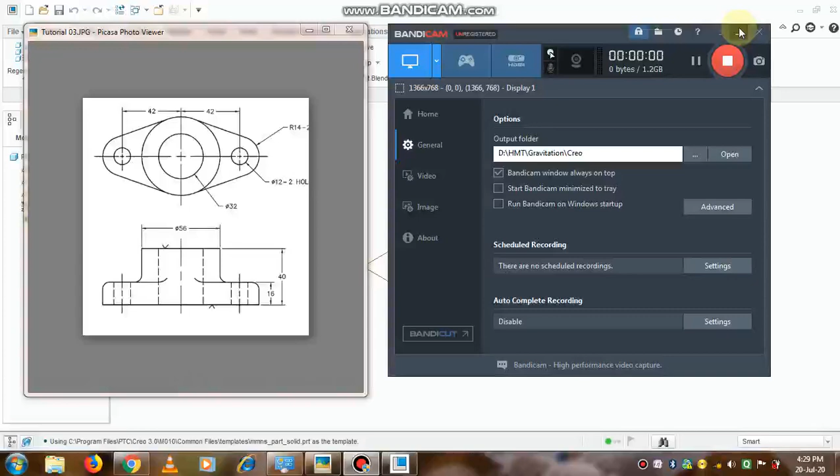In this video we will see how to create a pipe joint. So the front view and top view is available with us. Now from the front view and top view we can calculate the dimensions.

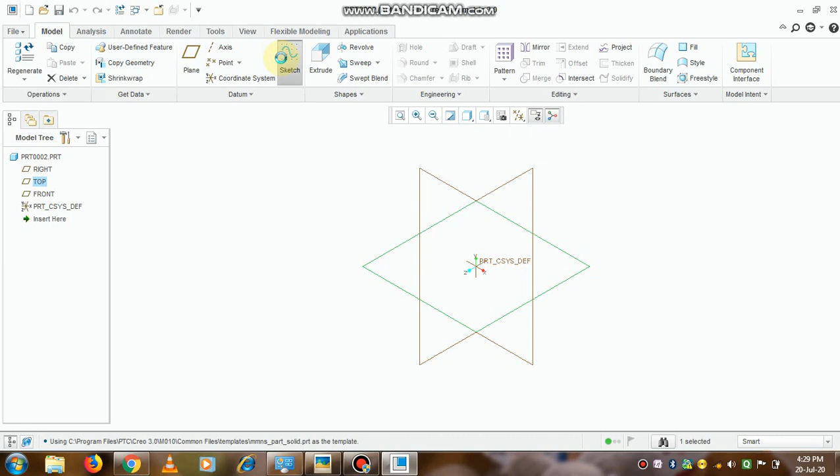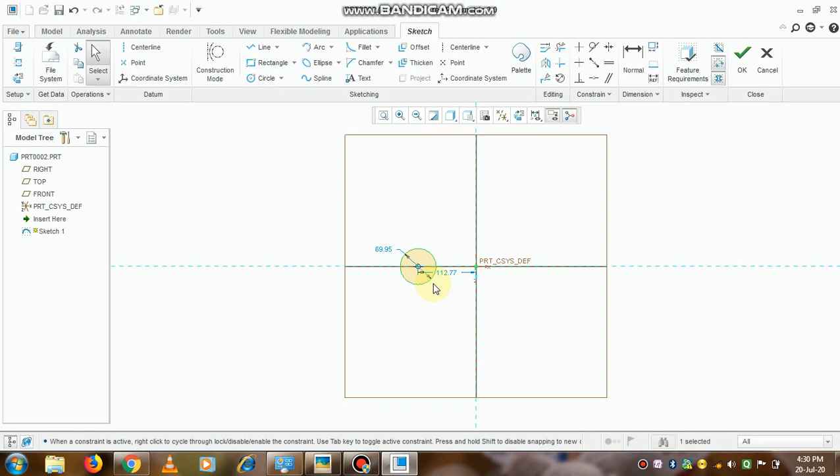So first of all select the sketch plane. Top plane I have selected here. Sketch view. Now first of all we will create a base plate. We can roughly create the geometry and then can give the dimensions.

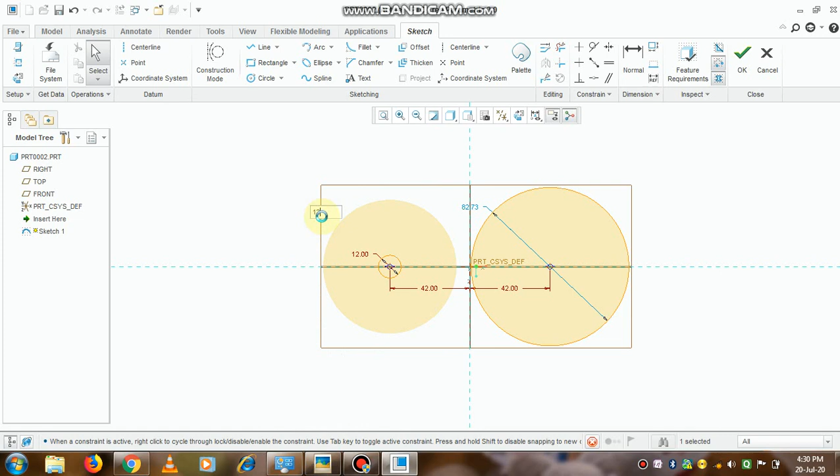So from the center the distance is 42, so that's why I am making it as 42, and the dimension of the hole again we can cross check it. So phi 12 is given, so diameter 12. Now for the outer hole, that is phi is given as 56, so we will create it.

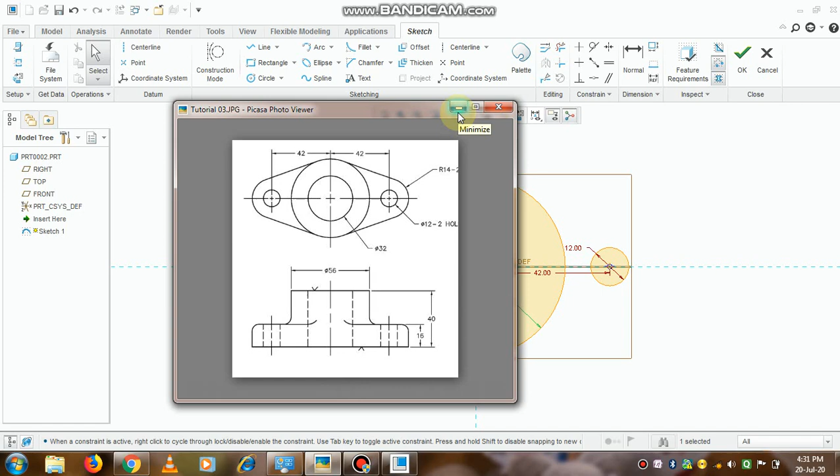And the radius is given 14 for the joints. We can say it as a coupling, so there the nut bolts can be arranged. It is basically a pipe joint. So R14 is given, so we'll make its diameter as 28.

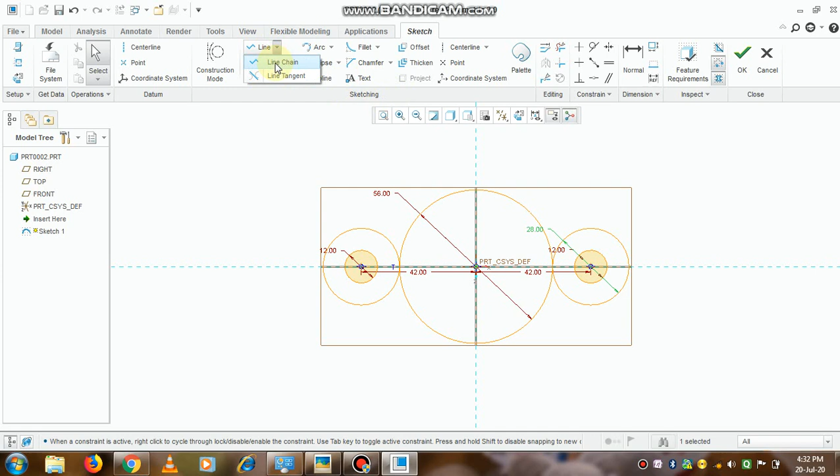And now see in the line option, line tangent option we will select, so that the tangent lines to both the circles can be drawn. So first of all we are drawing a base plate. So for base plate, the center hub portion we can remove it by simply going to the option that is delete segment. So that delete segment option will be available in the editing tool.

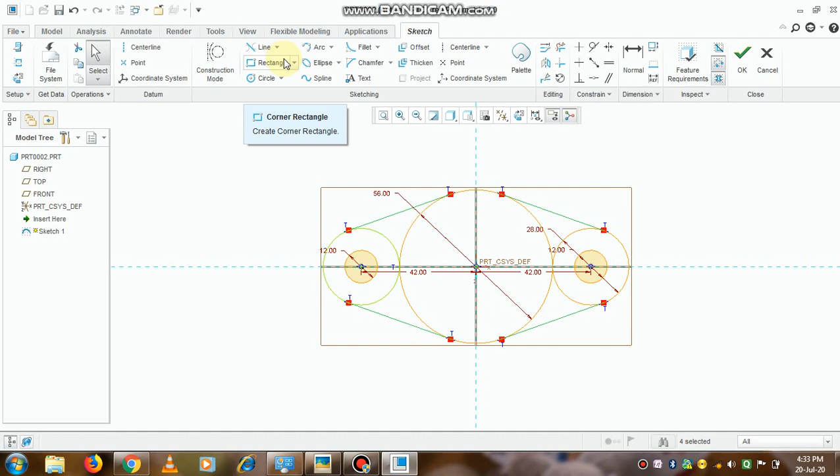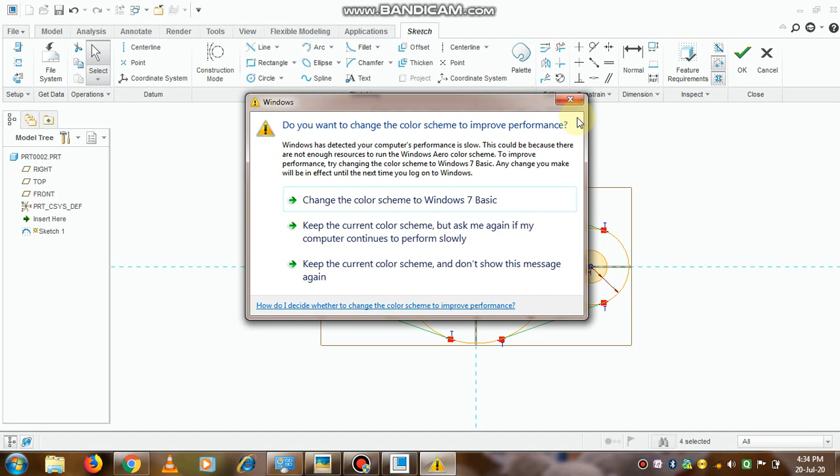So this is color scheme error, no need to worry about it. You can close it from this option.

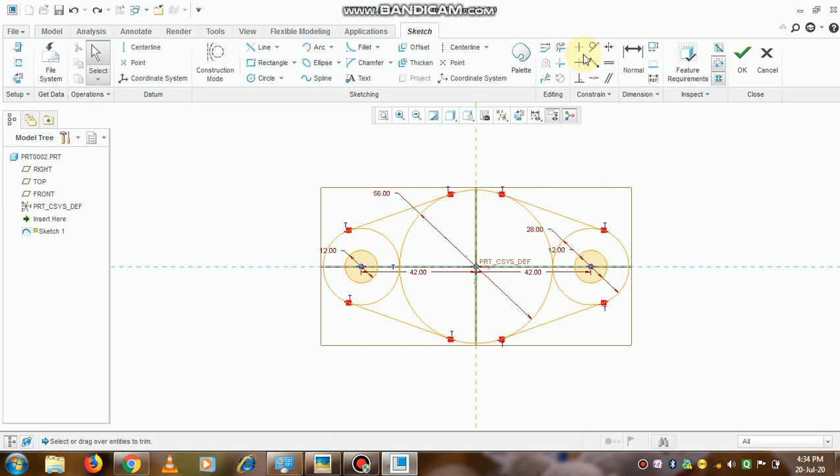If you keep the center hole as it is, what will happen when we will go to the extrude option, that complete base plate will take the thickness, but in this case what we want, base plate is separate and the center hub is separate. So that's why we are deleting it, and then again we will use the circle command and go to the option extrude, so that center hub portion can be extruded separately. Otherwise it will not be possible to create the different extrude options for the same sketch.

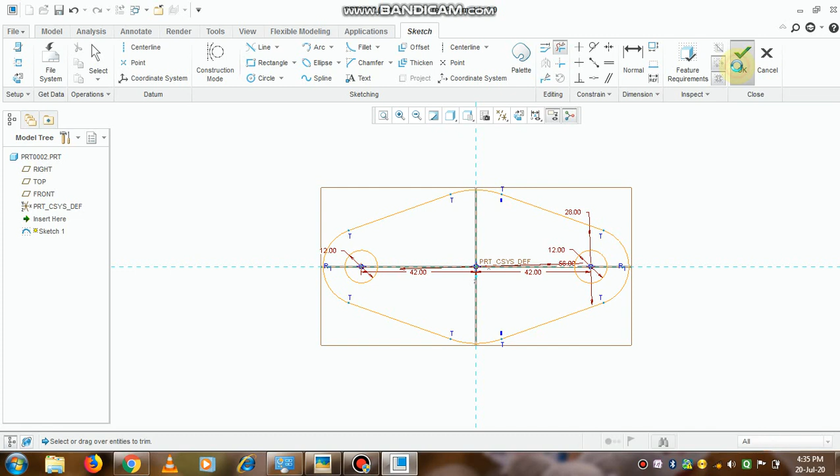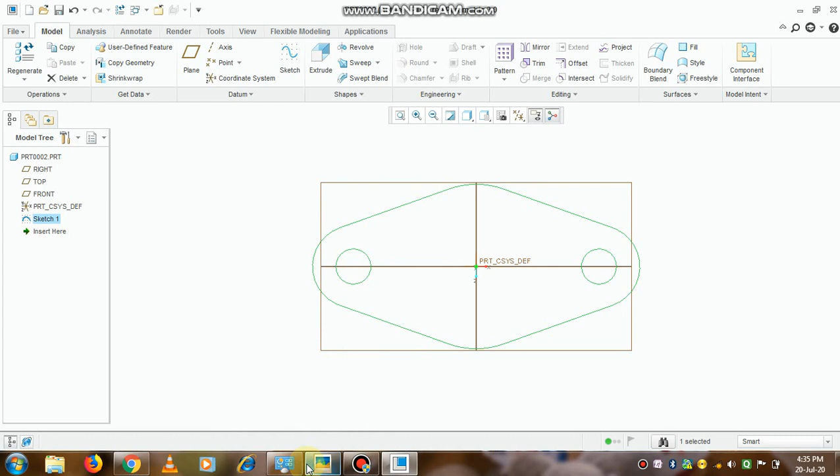But that phi 56 circle we have created so that we can easily draw the tangents between the two circles. Now we will check what is the thickness. So click on OK button and let's check the thickness. So the thickness is 16.

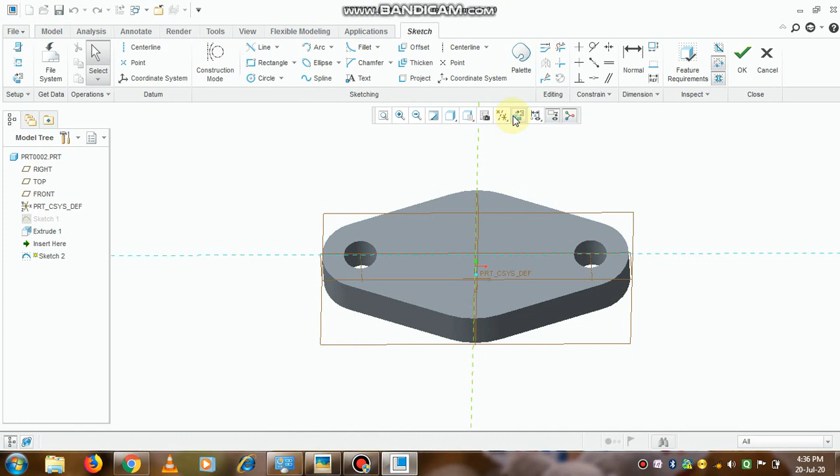Now again we select the top plane so as to create the center portion with phi equal to 56, and in that we need to create a one hole of phi 32. So select the top surface, go to the sketch option, or directly even we can go to the extrude option.

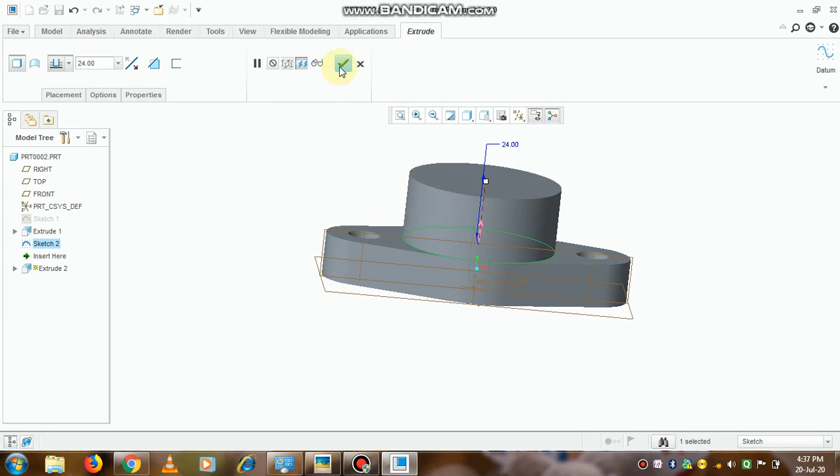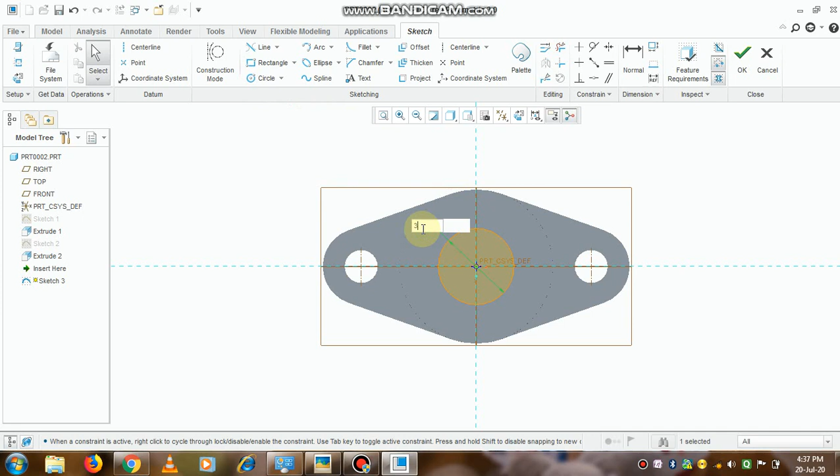Now total height is 40 and base plate is 16. So 40 minus 16, so 24, we need to create its extrude length will be 24. Now again at the center we need to create a hole, so select the top surface, go to the sketch view option and then a circle. So phi 32. And click on OK.

Now we need to reverse the direction of extrude so that the material will get removed. Okay. So we can finally save it in a working directory.

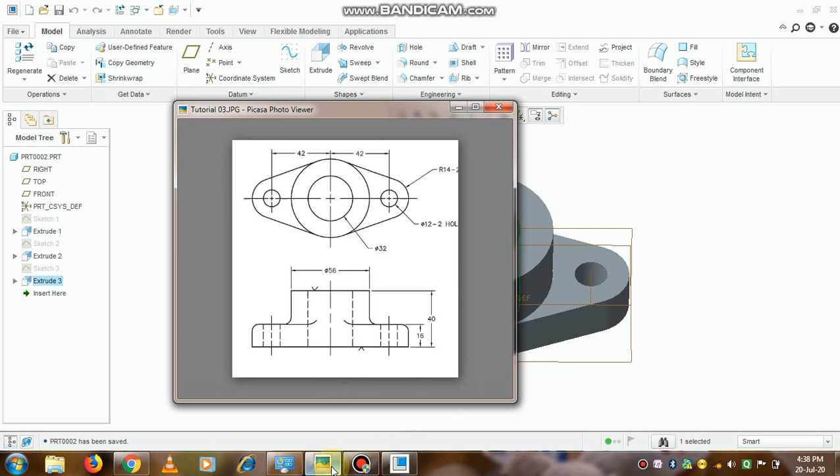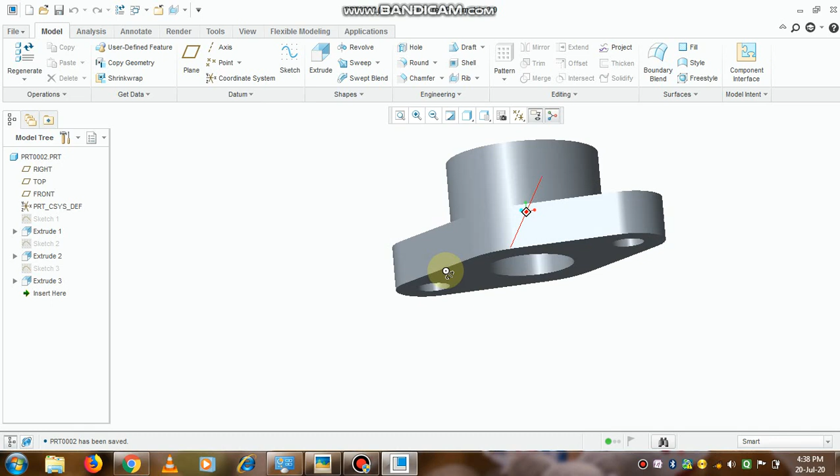Now fillet and rounding off is also seen in the figure, but we are not having the dimensions. That can also be done. You need to select the edge and go to the option round, and videos are already available where the round command is illustrated, how it can be done and how we can use the round command for all the edges.

Now this is the general view options. You can go to the shading options, shading with edges, and if you deselect it, then the reference plane will not be visible and the clear object image can be seen. So see, from these 2D drawings we have created an object.